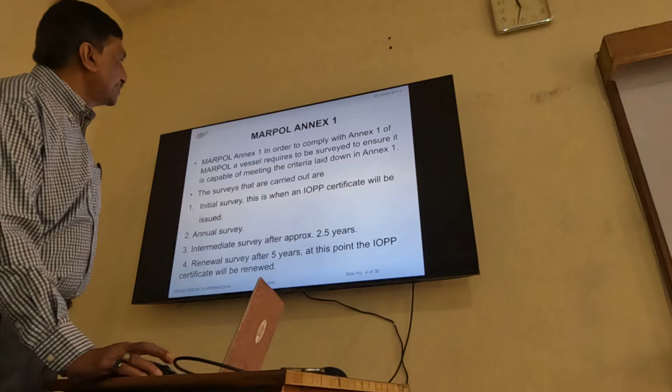So for Marpol Annex 1, we require IOPP certificate. Initial certificate is issued, and then we have intermediate at 2.5 years, annual endorsement, and 5-yearly renewal of certificate.

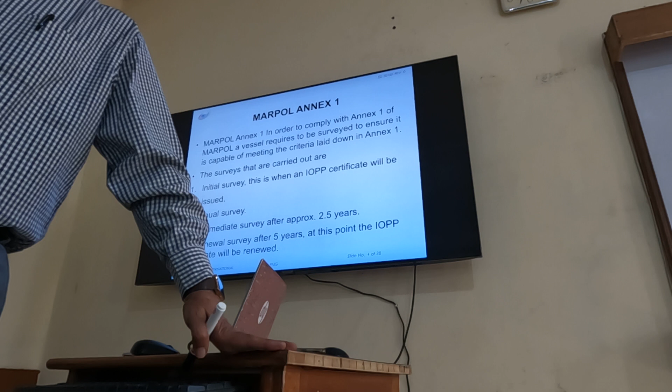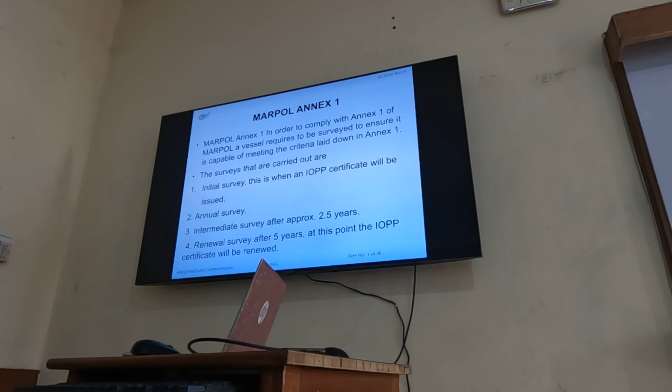What else is given is how you will dispose it off. That means for sludge disposal you have an incinerator or not. So the incinerator's capacity, how much it is, which is normally in liters per minute, because discharge rate is small - not discharge, burning of the sludge. So that is given. What incinerator is there, approved or not approved, only then will they give it, and its capacity. Similarly, oil filtering equipment which we use to pump out bilges accumulated in machinery spaces. So this data is available to us.

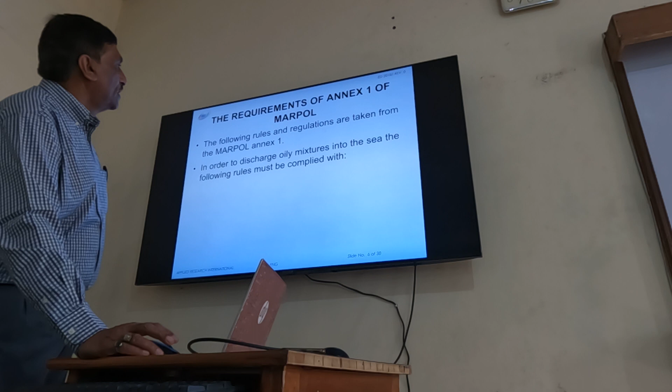Validity of certificate is 5 years. Okay, now we come to the regulation part. Alright, is this much clear?

Nothing straightforward. So we have for oil tanker, disposal of oil residues. We have a slop tank and we can pump it out as per the regulations. So these are the regulations: the tanker is not in a special area, tanker is more than 50 nautical miles from the nearest land, and tanker is en route. The instantaneous rate of discharge does not exceed 30 liters per nautical mile.

Total quantity for old ships is 1 by 15,000 and for new ships 1 by 30,000 of the total cargo which was there in the original tank which we have done the washing for. Tanker has in operation ODME. Correct. So this is as far as tanker slop tank disposal is concerned.

We have to follow these regulations. Then comes a requirement - this question comes very often. First question: sketch and describe oily water separator. Most common question - sketch and describe. And part B will be either what factors influence the operation of oily water separator, or if that doesn't come, instead they'll ask what are the requirements in special area and outside special area.

Most common question is this, if you see the past papers. So these are the regulations - this is bilge water from machinery spaces. What is accumulated inside special area and outside special area. So from all ships above 400 gross tonnage and from the machinery spaces, including from machinery spaces of tanker - that means whether it is a tanker or a non-tanker, bilge water accumulated in the machinery spaces, we are talking about that.

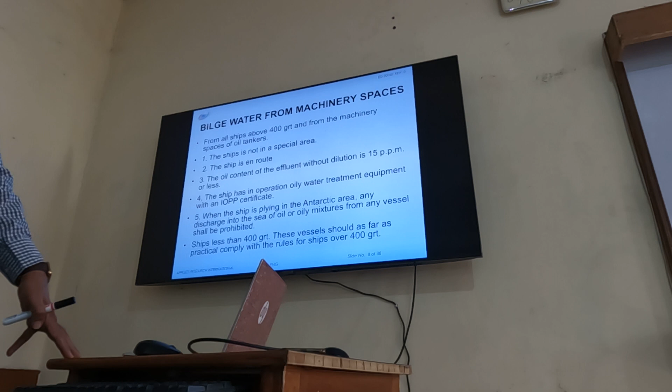The ship has in operation oily water treatment equipment with the IOPP certificate. So oil filtering is what we will be discussing. Oily water separator approved - we say approved because the OWS should be approved under MEPC 107. The OWS must be complying with MEPC 107, so you will have a certificate that your OWS is complying with this requirement.

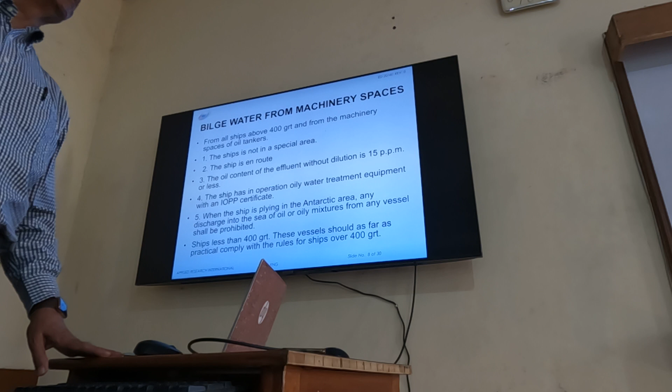When the ship is plying in the Antarctic area, any discharge into the sea of oil or oily mixture from any vessel shall be prohibited. There you cannot do it.

Ships less than 400 gross tonnage should, as far as practical, comply with the rules of ships over 400 gross tonnage. It's applicable to those over 400, but it is advised that even smaller vessels must comply with these requirements, although it is not mandatory.

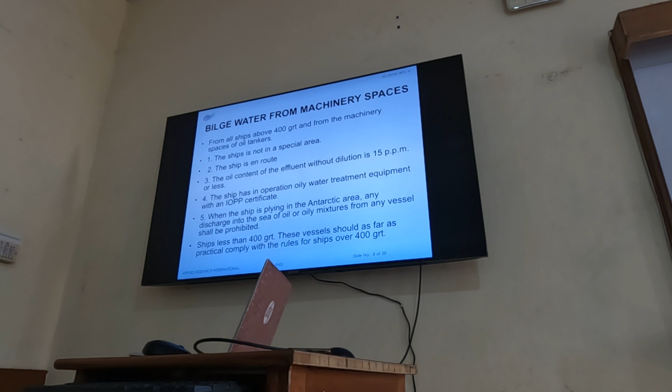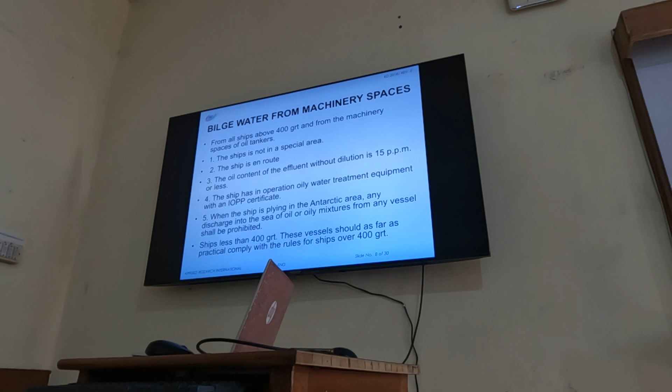This question is very simple. I will show you a sketch now which you also have at home. Only thing is, I will tell you to make one amendment in this diagram - it is not complete, it complies with the old regulation. There's a small line you must add to demonstrate that you are up to date with the current regulation. Otherwise no problem.

Okay, so let us come here. Now, discharge in special area - correct? The first one was outside special area. Now we are talking about special area.

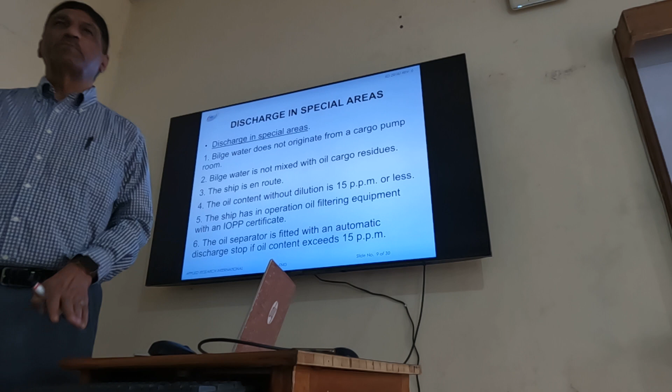Type approved under this - this is different. The oil separator is fitted with an automatic discharge stop if oil content exceeds 15 ppm. That means an auto shutdown device - we call it auto shutdown device.

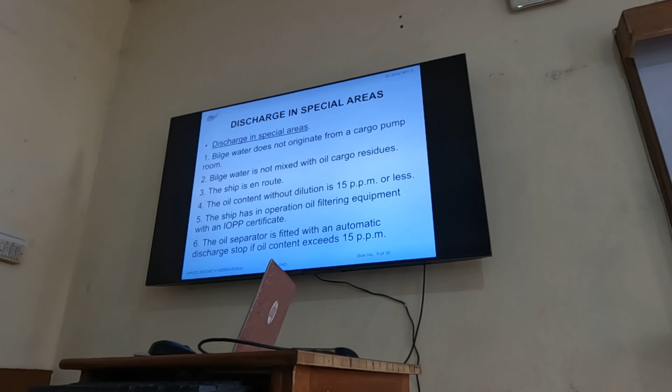If you have that, then you can discharge in the special area as well. So the rest of the points are the same except for this one difference. So this is for within special area, and earlier we had outside special area.

Exception to this rule - the exception is that this does not apply when discharge of oil into the sea is necessary for the purpose of securing the safety of the vessel or saving life at sea. If it is for that purpose, then you are allowed, and you already have provisions for this in the ship. What are the provisions?

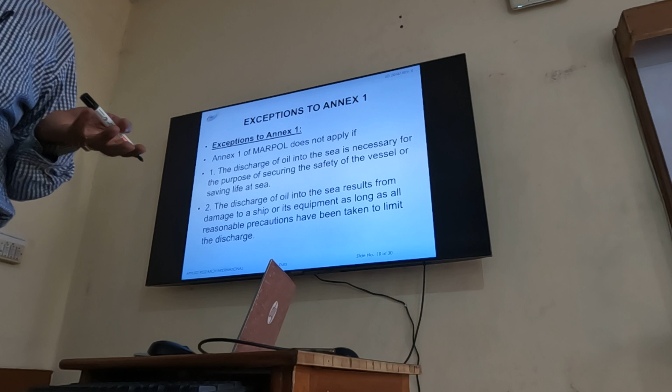Suppose there is a vessel that will sink and the engine room is flooded - how much water will come in there? So now you can't say you'll use the OWS, as that will take a week for that much water. So you have an emergency bilge suction and you have GS and fire pump direct bilge suction. Even if oil is coming in it, because of the safety of the vessel and the people, you can just use that direct pumping out. That is what it means.

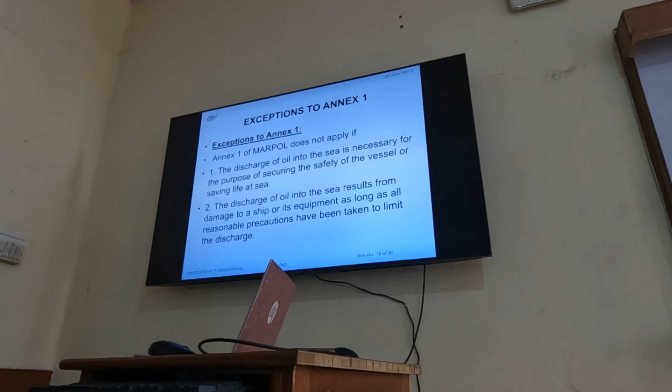That it does not apply if the vessel's safety is at risk - the discharge of oil into the sea results from damage to a ship. If there is a collision or grounding, and oily bilge water or oil has gone out because of this reason, then also it is not a violation. That is the exception.

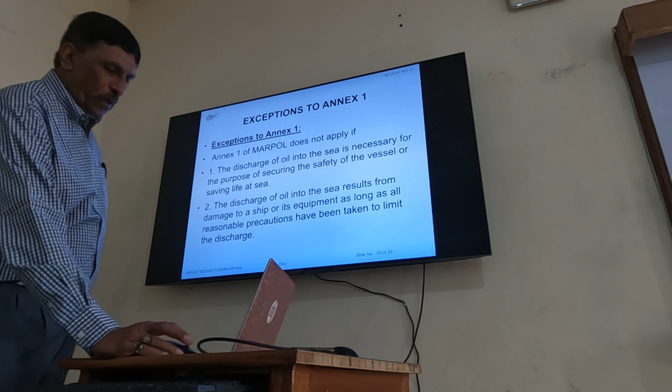Okay, special areas - plenty of these are there, so this list is there, so we can see which is a special area and which is not.

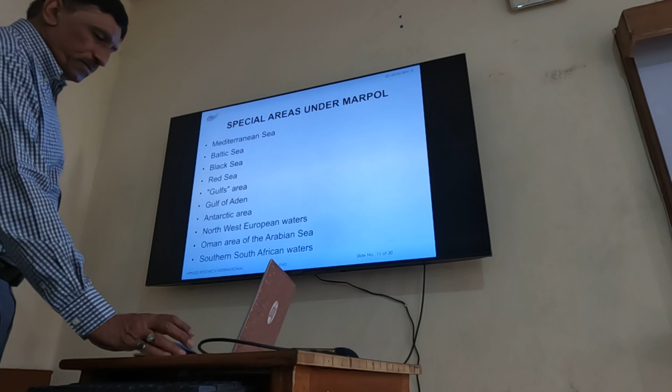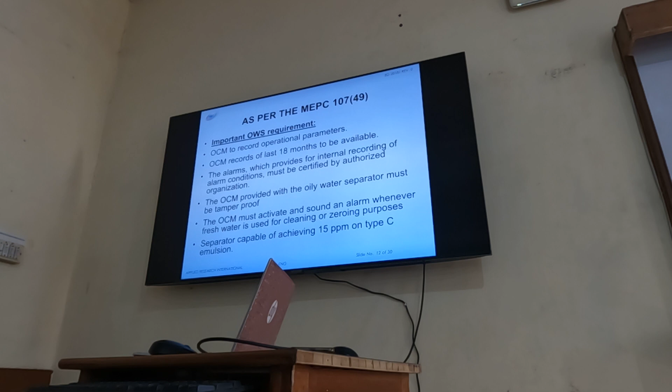As mentioned, OWS must comply with MEPC 107(49). Under this, there are certain important points to know. OCM must record operational parameters. The oil content monitor is fitted with memory, so it records the operational features as provided under MEPC 107(49). OCM records of last 18 months must be available, meaning minimum storage capacity must be sufficient for data storage for 18 months.

If it is recording for more than 18 months, that is even better, no problem. But it should not be less than 18 months.

The alarms which provide for the internal recording of alarm condition must be certified by an authorized organization. So it is an approved equipment. This is what it means.

It should be tamper-proof, meaning there is a seal. If the seal is found broken, that means it is a straightforward non-compliance, indicating somebody has tried to tamper with the storage data. So that seal should be intact, within the oil content monitor. Seal should be intact.

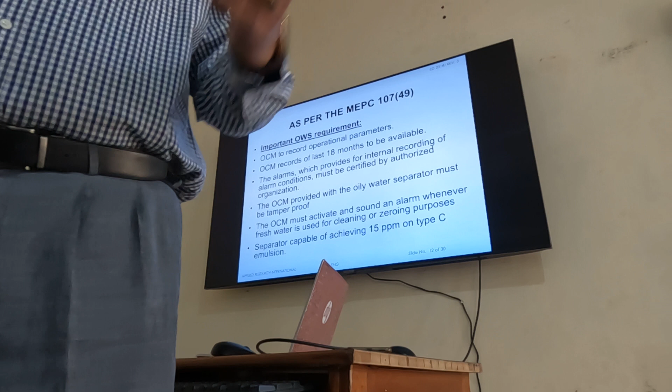OCM must activate sound and alarm whenever fresh water cleaning is done. Let me explain fresh water cleaning briefly. Inside the OCM there is a cell through which the sample water passes, and that detects the ppm of the bilge water being pumped out through the OWS. To clean that cell, we have a solenoid operated line. When it energizes, fresh water goes through it and cleans it. This must also be recorded, so it must give an alarm indicating that fresh water flushing is going on.

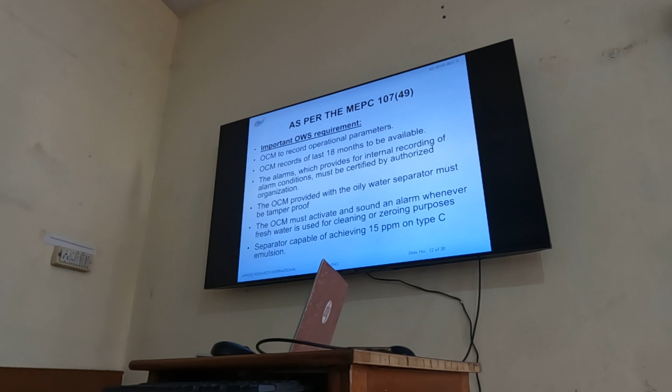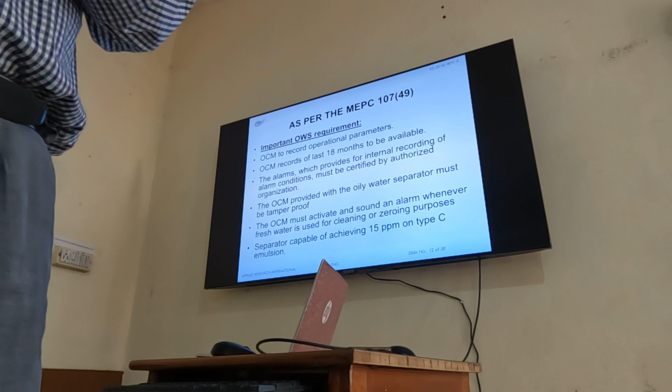Separator capable of achieving 15 ppm on type C emulsion. This type C emulsion is one of the standard emulsions - A, B, C - where you mix water with heavy oil, diesel oil, and so on, because that's what comes in bilges. Some drains, but we don't know exactly which drain it is - it could be lube oil too. So as a standard, during type approval, they prepare standard solutions and the separator should be capable of separating them. This is the meaning of this point.

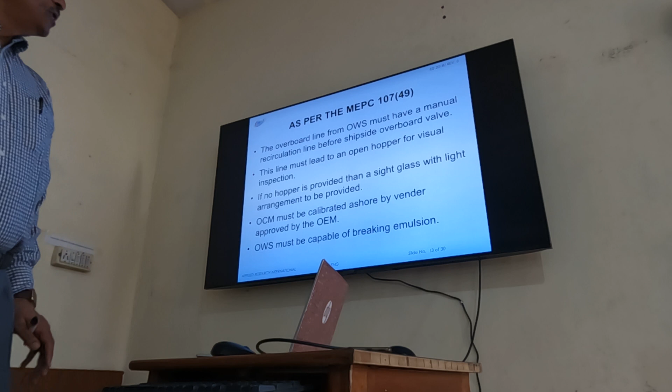The overboard line of the OWS must have a manual recirculation valve. This is what I was telling you - we will add this in the diagram.

So if ppm is more, it will shut down - there is a valve before which if ppm is more, it will recirculate back to the holding tank. If it is less, then it will go to the overboard line. But the overboard line is closed, and with this manual recirculation valve, it will go back to the tank instead. So in both conditions, whether ppm is more than 15 or less than 15, nothing goes out, and the system keeps running - OWS is running. This way, the surveyor can confirm the plant is okay, and the renewal certificate can be issued.

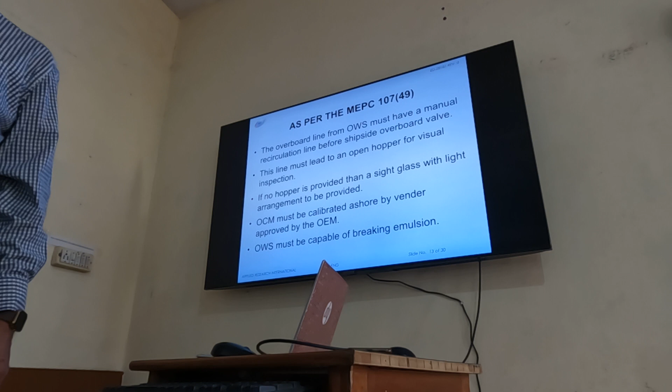The same valve is nowadays used with PSC. PSC also says okay, I want to see it running. So they keep the ship side valve closed, open the recirculation valve, and then you run the plant. If ppm is less than 15, it will recirculate through the manual valve. If more than 15, it goes through the shutdown device's recirculation line. In both cases, the plant will keep running. So this is the purpose of this valve.

Now this is your oily water separator. This is the same as what is there in your diagram, only it is shown up to here only. But actually, because of this recirculation valve, let me show you where the valve has to be fitted first, and you can extend this diagram by hand. This is as per MEPC 107(49) - if you download it from the internet, you will find this diagram there. So up to here we already have it - this is the oily water separator, this is the auto shutdown device.

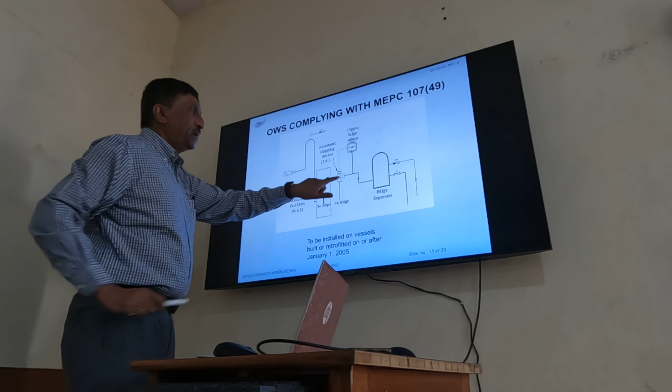Agar PPM is more than 15, this 3-way valve will open and water will be sent back to the bilge holding tank. Agar 15 se kam hai, then it comes here, and if this valve is on recirculation, this will also recirculate back. But suppose less than 15 and I keep it on overboard, then it will go here. So out at sea, as per regulation, when I am entitled to run this, I will keep this on overboard.

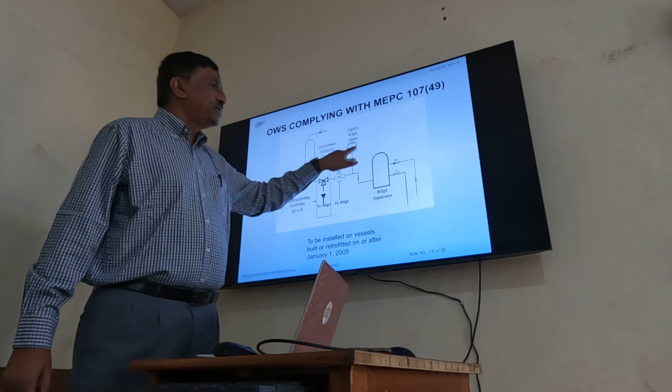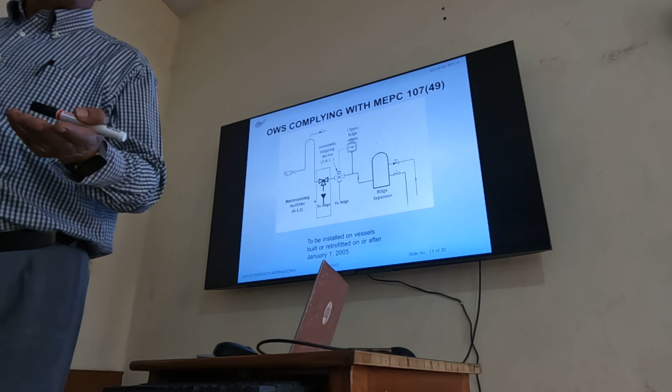Maan lo ab 15 se kam hai toh ye operate toh nahi hoga na. Then it comes here. This I have kept it on overboard. 3-way manual hai ye. I have kept it on manual. So less than 15 will come from here and go overboard. So I am able to pump out.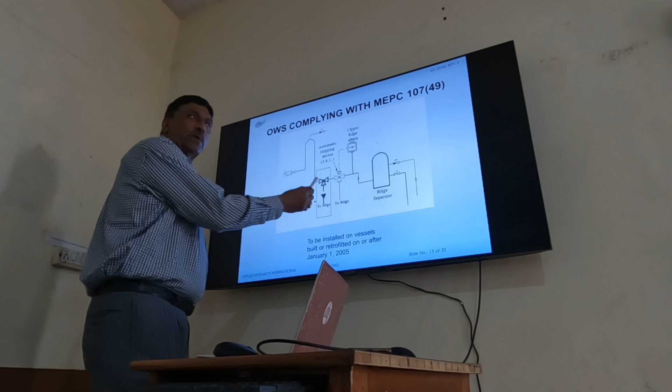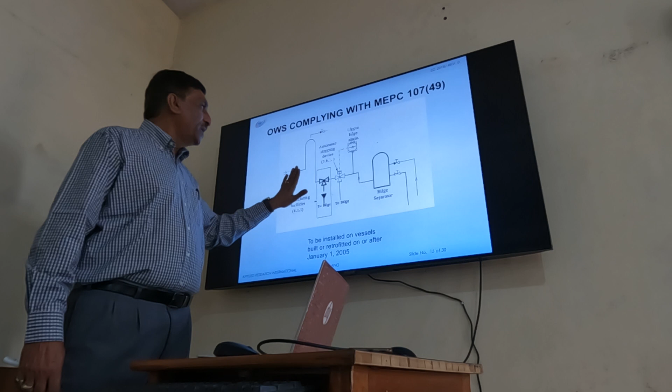So this is incorporated for renewal of your, when the surveyor comes. Kyunki jab surveyor board mein aata hai na, we cannot open this valve. Ye ship side valve toh hum nahi khol sakte. Lekin hum agar ye valve nahi hai, maan lo suppose this valve is not there, I cannot run it. I cannot run OWS. Isko recirculation mein chala, kyunki 15 se kam agar hoga toh it will try to go here. Ye valve band hai, so it will not go anywhere. I cannot run the OWS.